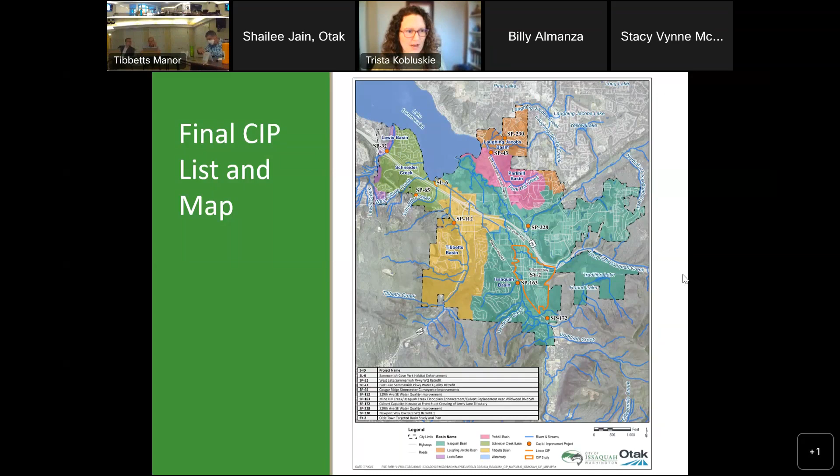Or do I have to do that because I have control? Sorry, I'm new at WebEx, so I'm not sure. I think so. I think you're still. I don't know how, though. Okay. I don't know how to move the slide. Okay, there we go. Okay, thanks.

So this is a slightly more detailed list. This is in order first by basin and then by rank within the basin. And what we had planned to do at this meeting was take a quick, slightly more detailed look at each one of these CIPs. So the next 10 slides really are a map of each one's location, and give us a chance to talk about what's going on in that location and what we think the solution is.

I'm actually going to release control if I can figure out how to do that. Let's see. We can take. Alan, can you, I can't. Nancy has a question for us? I'm sorry? I just have one quick question.

So about a year ago, we were getting feedback, I don't have access to my internet right now, so I can't, about the impact of brake linings and tires on salmon and kokanee. Do any of these projects potentially look at what we can do to improve things like that? Yeah. We'll get into that, but really the retrofit projects that we're going to show you later here, they're addressing that. So there's water quality treatments. They're standard. They're using technology that's been around a while.

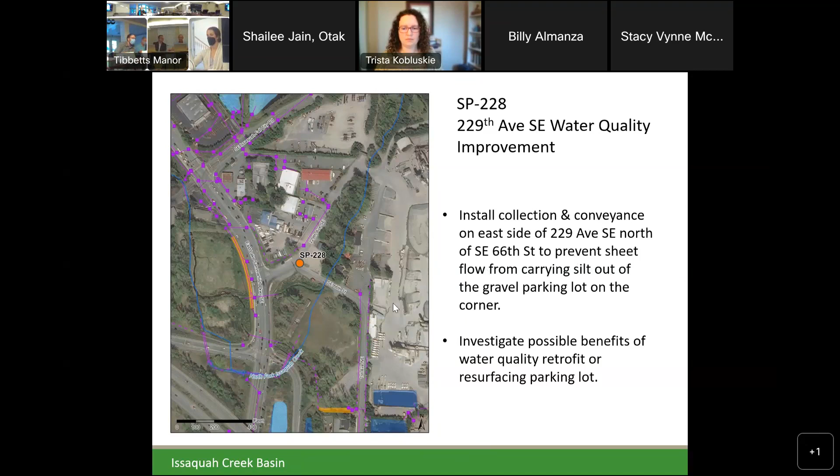Great. Thank you guys. Put it back to the forest. Forested condition. Alan, you know me well enough. That's my solution for a lot of things. Give you credit for that.

Yeah. All right, next project, Mine Hill Creek Issaquah Creek floodplain enhancement culvert replacement near Wildwood Boulevard. This really came out of some of the issues that our maintenance department operations had identified. I think it's a good project because it targets a lot of different benefits. Essentially what happens is high velocity flows during storm events come down Mine Hill Creek, which is this creek right here. And there's a culvert that crosses Wildwood Boulevard.

Right before that culvert, on the inlet side, there's a big trash rack and it creates a sedimentation basin of sorts where the water comes down and moves gravel, which is a natural process from the hillsides, mass wasting. You do want gravel recruitment. That's how you get gravel into the streams that help the fish for spawning. But the problem is that gravel piles up there, and if it's not maintained on a regular basis, bigger storms will basically flood the roadway, Wildwood Boulevard Southwest.

The project we're proposing is looking at putting in a bigger culvert, more likely a box culvert that's fish passable. And this is also, I believe, Trista identified as a fish passage issue. Is that right? Yes, it is. Okay, so in terms of the issues, we also looked at the database from WDFW that has all the identified fish passage issues within the city of Issaquah, and this is one of them.

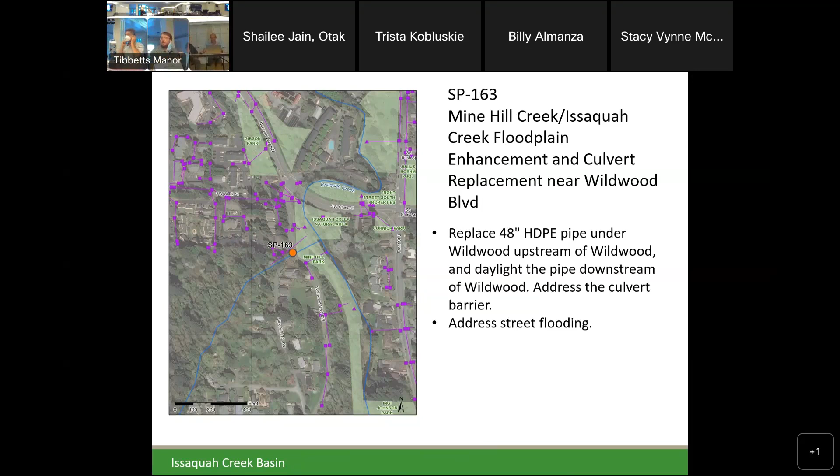Next project, SP 172, culvert capacity increase in Front Street crossing of Lewis Lane tributary. So this project, I don't know, Trista, you want to take this one on? I'll just kind of go over it, but essentially this is one that came up pretty frequently. There are a lot of hits on issues here that we identified for the Issaquah Creek assessment that we had done, and all the outreach and the public comment, and where we had the web map where people could put pins and discuss the issues.

And this area really along 6th Avenue Southeast, there's a lot of concerns of flooding along here, and it's a combination of some undersized pipes. There's also a culvert crossing. So this is Lewis Lane tributary up here, and then there's a trib to that, which is this one right here, and it crosses underneath 6th Avenue Southeast, and that culvert's undersized. So the thought was here, because there seemed to be a fair amount of public comment on this, that you would look at investigating doing some type of improvement along here, whether it's upsizing conveyance systems, putting a new culvert crossing here, something to that effect.

So I don't know, Trista, do you want to, or maybe GLA, you want to chime in on it? I think you mostly covered it, Alan. There's a lot of flooding complaints in the area, and the project is really investigating the drainage system and coming up with a solution to manage or avoid that local flooding. We need to do some investigation to figure out which exact elements of the system need to change, but that's really what it's intended to solve.

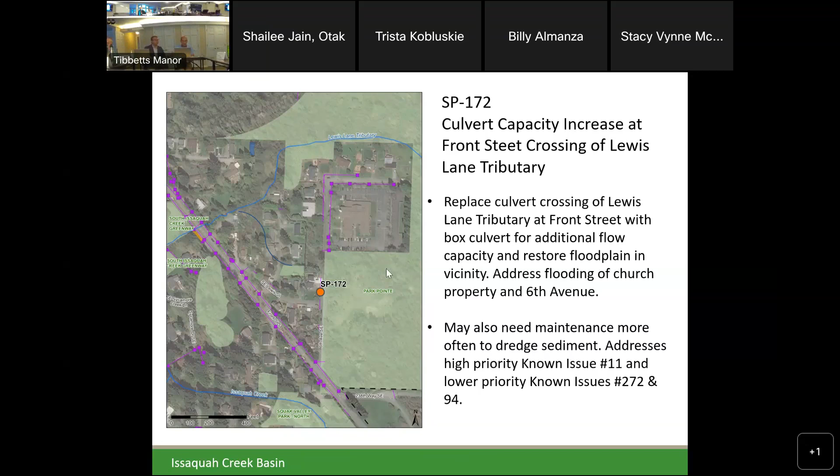Okay, Sammamish Cove Park, you have that in. All right, so this project is over near the state park. This is a portion of Schneider Creek, the portion downstream of I-90. So a couple things going on with this project. This was really one where we felt we could combine it or work with WSDOT in terms of what they're doing, because right now they have plans to do several culvert replacement projects on I-90 to meet the mandate that they have to replace all these culverts within a 10-year time frame that are non-fish passable. And so this is one of them.

So basically Schneider Creek has a non-fish passable culvert, so they need to go in there and replace this culvert. And we thought that this would be a good time to look at doing some channel improvements. Like I said, we tried looking at a mixed bag of water quality projects, flooding projects, and habitat projects. And this is one where we thought would be a good opportunity to do a stream enhancement or habitat project downstream of I-90. Similar to what the city's doing right now in construction with the Lower Issaquah Creek Restoration Project. It's a great project near Costco where we're putting in side channels, backwater channels, and large woody debris, and that will be completed at the end of this year, if you want to go out and look at it.

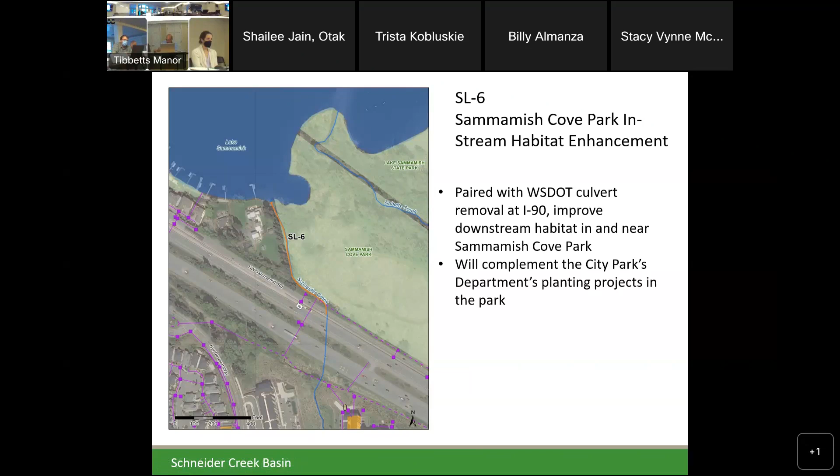Okay. Let's move on to the next one here. SP 65, Cougar Ridge Stormwater Conveyance Improvements. The problem is you don't really have an idea of where this is. We had that map earlier that showed all the projects, but it's kind of hard to tell when you zoom in. But this is up on Cougar Ridge, in the Schneider Creek Basin, just upstream of the creek we were just looking at, on the hillside of Cougar Mountain, off of Newport Way. Does that give you a good sense of where we're talking about?

Anyhow, it's a subdivision where there's been flooding not only within 193rd Place, but also Southeast 56th Street, which has occurred in the past. Once again, when we get these higher velocity storms there's erosion and scouring of the hillside, and it deposits gravel and sediment just upstream of where it connects. Basically the stream connects into the storm system here, and then the gravel deposits there and clogs. If it's not maintained sufficiently, or if we get a big enough storm that overwhelms the storage behind the inlet structure with the trash rack on it, then it will flood.

So similar to the other project I talked about earlier, this would basically do something to improve that. The problem here is a little bit different because there's no Issaquah Creek right downstream of it. So the sediment would go into the local storm system, so that's something we have to think about. How would we do that? More likely upsizing the pipes to the collection system. So that's a little bit of a tricky one. Trista, do you want to add anything to that?

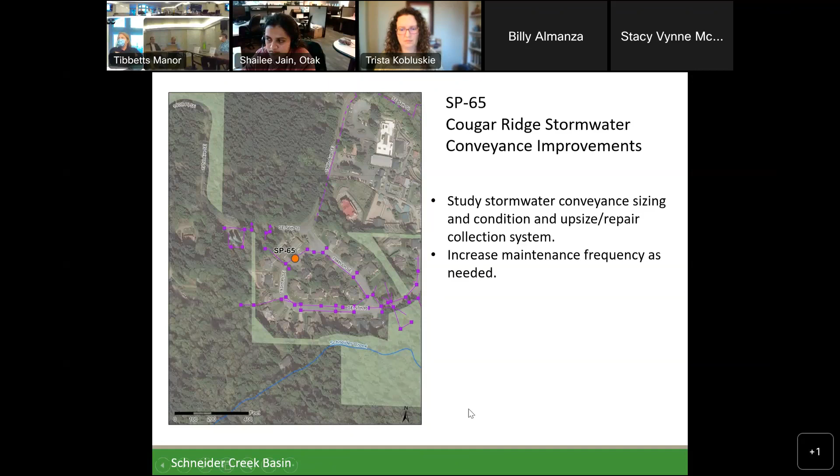Yeah, like I said, it's a natural process. That's how our creeks get replenished with their gravel, and we're sort of choking it out when we build these storm systems. So we got to figure out a way to trap it so it doesn't flood, and remove the material more efficiently, basically what it comes down to. So, yeah. Any more comments, questions?

When the gravel gets removed, is it put into the Issaquah Creek in an area that might need some gravel? Yeah, there's no requirement for that. It's not like mitigating anything. Our crews, I think they stockpile and dry it out a bit, and then they get sent off. I'm not sure where they send it exactly. We have several of these facilities.

Actually, one right here. The Tibbetts Manor Sedimentation Basin, which is just right off of Tibbetts Creek. In fact, I have to bring it up now, even though it's not on our top 10, because we're already addressing it. There's a study we're going to begin that's going to look at how we can remove that sedimentation basin and allow the gravel to migrate through and not cause flooding.

Replenish the gravel downstream, and of course eliminate all the maintenance costs, because right now we're spending like $40,000 a year, I think, to maintain this sedimentation basin and remove gravel out of it. It requires permitting every couple of years, so we're working with Trout Unlimited, and we got a grant from King County to study this system, correct?

To study this system all the way, so this is a good example of leveraging grant money. It's gonna solve a problem, save us money in the long run, help eliminate flooding and help the fish. But it's not in this list because we're already addressing it. These are projects we want to incorporate into our CIP. This one already is in our CIP in the future. That's great news. Thank you so much for doing that. Well, actually, Gary spearheaded a lot of that effort for that grant.

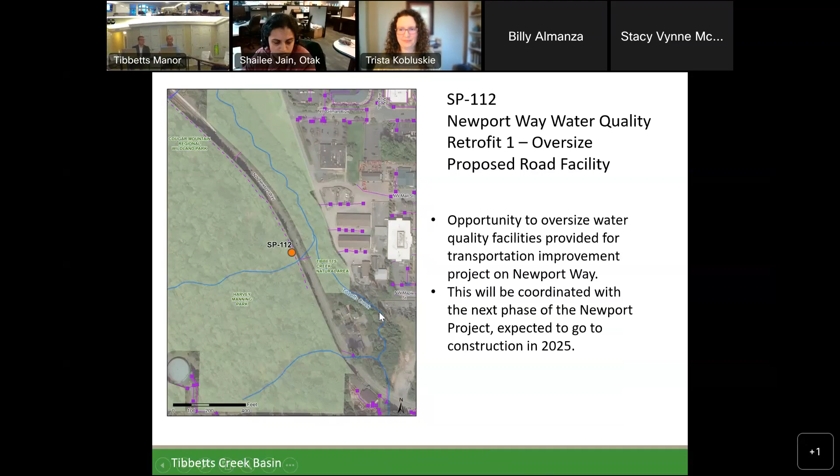Yeah, on a daily basis, generating a lot of pollution, a lot of tire dust, a lot of oils and grease. So this would be a prime candidate for some type of retrofit. As Gary mentioned earlier, this GIS layer we're putting together, when fully built out, would identify areas like this where there's no treatment. This road was built in the 70s, back then there was no treatment, and it has high ADT, so we should definitely target this as a retrofit project. So that's a good example of what we're proposing to do.

And this was included, so let me just go back, one more thing I want to add. In addition to the effort we're doing here with the Stormwater Source Water Master Plan for Issaquah, the City of Sammamish is also developing what's called the Laughing Jacobs Creek Basin Plan, and the city partnered with them because about 20% of the watershed of Laughing Jacobs Creek is in Issaquah. Even though the majority of it is up on the Sammamish Plateau, the most important part in terms of fish use is actually in Issaquah.

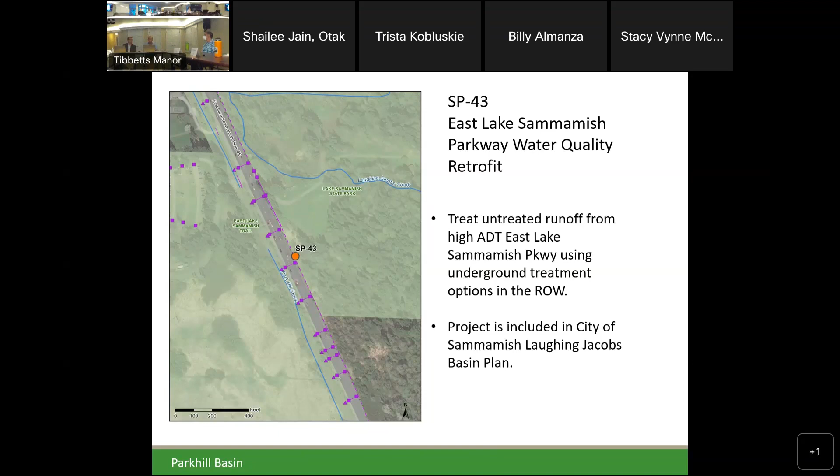So Laughing Jacobs Creek is very important for kokanee. They use that system for spawning, so it's a critical habitat for them. As part of the Laughing Jacobs Basin Plan that Sammamish developed, we're basically going to use their information. We took their finalized plan and peeled off some of the projects they came up with, so we didn't have to be redundant in our efforts. This is one of two that they recommended that we're going to use. So once again, we tried to collaborate as much as we could with them to develop this CIP.

Okay, any questions? SP 230, yes. Are the schools that are being built going to be a big issue for that project? Well, the high school and elementary school are going to have to do their own mitigation, right? They're going to provide their own treatment for their site in terms of water quality and detention. This one is not even, we're going to get to that. There's another project closer to the school district projects, but this is over on East Lake Sammamish Parkway. So it's not really going to be impacted by those two schools.

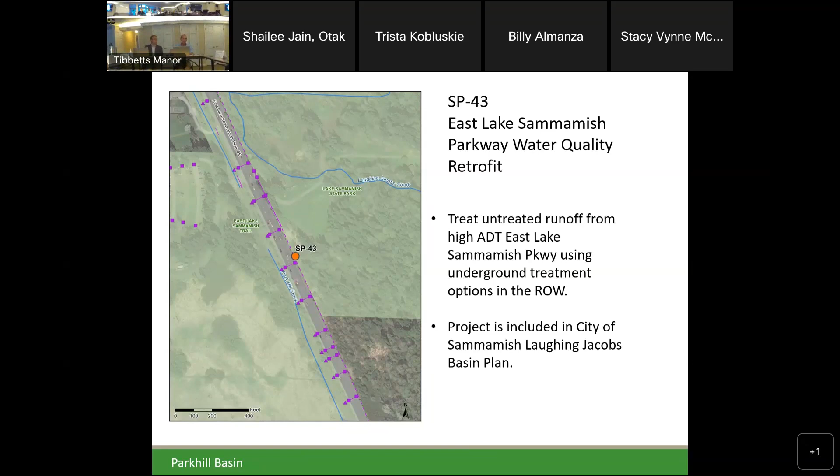Just upstream is a section of Southeast 43rd where the city did a signal project and an intersection improvement project maybe 2 years ago. That project did put in 2 detention tanks and a modular wetland to treat that area. So this would just help continue that treatment all the way down 43rd.

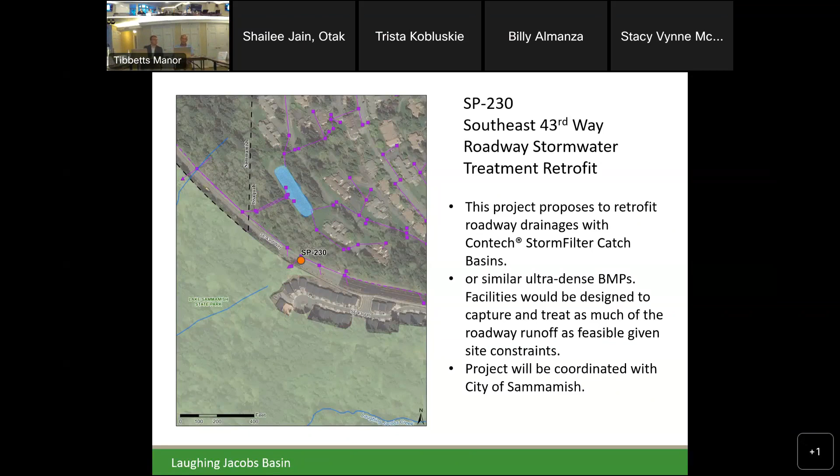So this project is another retrofit project. Once again, WSDOT is going to be designing, and they're going to replace the Lewis Creek culvert with a $50 million series of 4 box culverts across I-90. So this would be working and coordinating with them. Part of that work is going to involve modifying West Lake Sammamish Parkway because the creek goes underneath I-90 and also underneath West Lake Sammamish Parkway. Because of grade issues, to get a box culvert in there, they have to raise the grade of West Lake Sammamish Parkway, so they're going to modify that roadway a bit.

And we thought that's a great time to go in there and collaborate on a joint project. While they're tearing up the road, let's go ahead and put in a system to treat the runoff on that roadway. Alan, just to be clear on that one, it's not like we're taking over their requirement to do this, we're doing extra, combining resources.

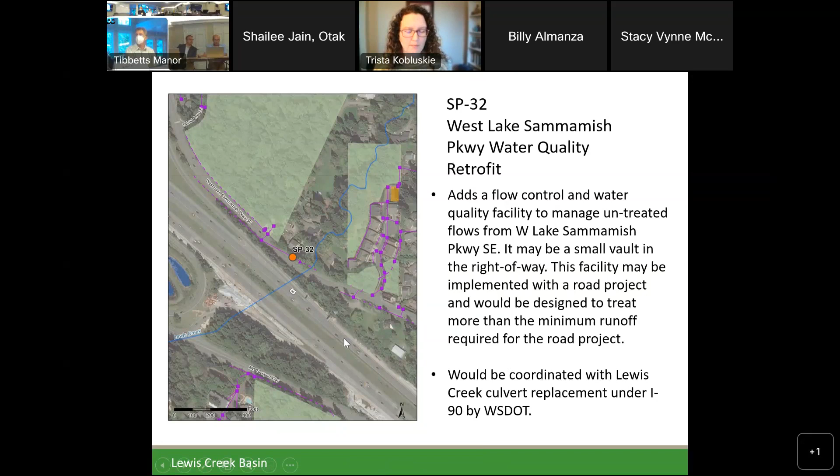Great. Oh, that was the last one. So, any questions? Tom, you have a question?

Yeah, I'm wondering about the backlog. Okay, here's some great projects we're gonna work on, but then there's this huge backlog, and the tools and methods and our understanding of the science behind all this is improving greatly. Is there any hope that our backlog would get smaller, or will the backlog just keep getting bigger and bigger?

And how would you measure the City of Issaquah's response to these problems compared to other jurisdictions? Is it in line with what is typical for jurisdictions in this area, or is the City of Issaquah doing a bang-up job above and beyond what others are doing? How do we sit with that?

Yeah, a few questions there. So two things on the backlog. One, when you look at the projects we're proposing here, we're working on our 23-24 budget right now as we speak. You're going to see a few of these projects on there, but not a lot. The current rate study ends in 25. So we'll probably in 24 be starting a new 5 to 6 year rate study, and all this backlog will be worked into that for these projects.